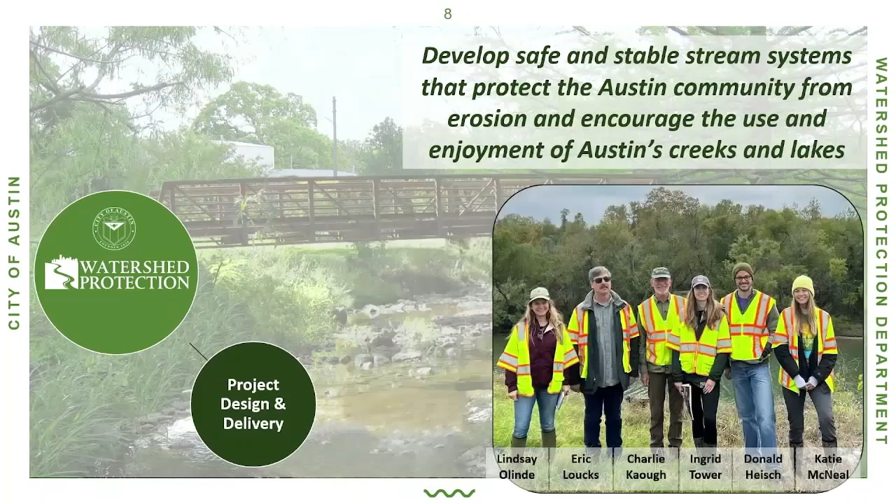For the people who are in stream restoration now, can you raise your hands so you can kind of see where everybody is? Donald, Charlie, Ingrid, I'll take you, Tom, Eric—where's Katie? Okay, good, thank you, Katie.

We are nestled in watershed protection. Jorge went over some of the reorg that we've been doing. Our division now is in the project design and delivery. For consultants who work with us but haven't fully caught up with our reorg, one other group I'll shout out is the floodplain office, which is now in planning, monitoring, and compliance.

The 4 gears that we tend to use on a day-to-day basis have to do with planning and programs, design and construction, and then technical assistance and supporting policy.

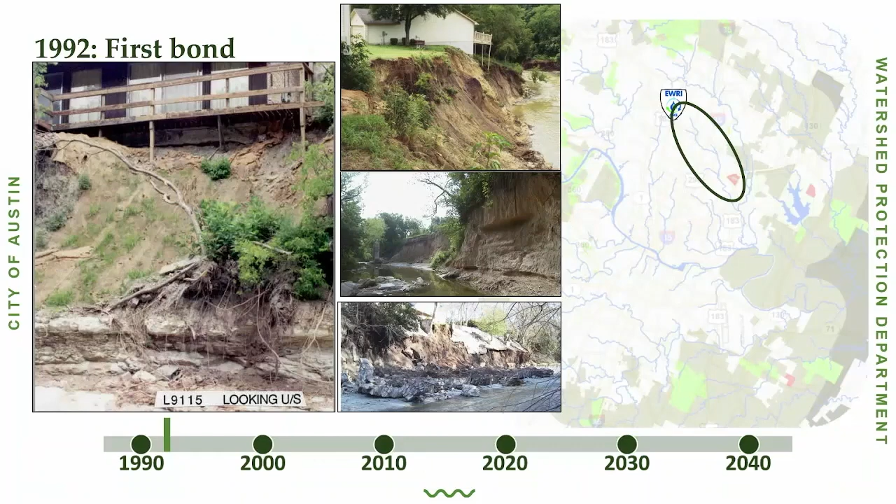Our origin story starts off near where we are right now—we're in the headwaters of Shoal Creek. Did anybody know that? I didn't; I was thinking we were in Little Walnut. In the 1990s, there was a really dramatic storm with really dramatic flooding and really dramatic erosion.

That kicked off the first really erosion-specific bond, which happened in 1992. A lot of these projects funded by the bond were done in Little Walnut, but also Tannehill, kind of central East Austin, where we're starting to get into that Blackland Prairie bluffs. These images are pretty consistent with what those projects covered.

That started this database of erosion projects. Even though it might be a little boring for people who don't love big data like I do, it's really important for our entire program—it defines the pool of problems that we might address.

In the early years, we mostly had community concerns—people calling us up saying, hey, we have this problem. So responding to that community concern really justified and led a lot of our project selection, and justified the establishment of this erosion program in 1994. We realized we can't just rely on the community, so we needed a systematic inventory of the streams, which we did through watershed assessments.

So that's going out, taking an inventory, looking at the conditions. The first set of assessments was 17 watersheds in central urban Austin.

That's right where central urban Austin is that transition zone between the resistant bedrock in the Edwards Aquifer and the more erodible Blackland Prairie. So in that transition zone is where we have all of our development. That's where we wanted to start. Where are we having the problems now?

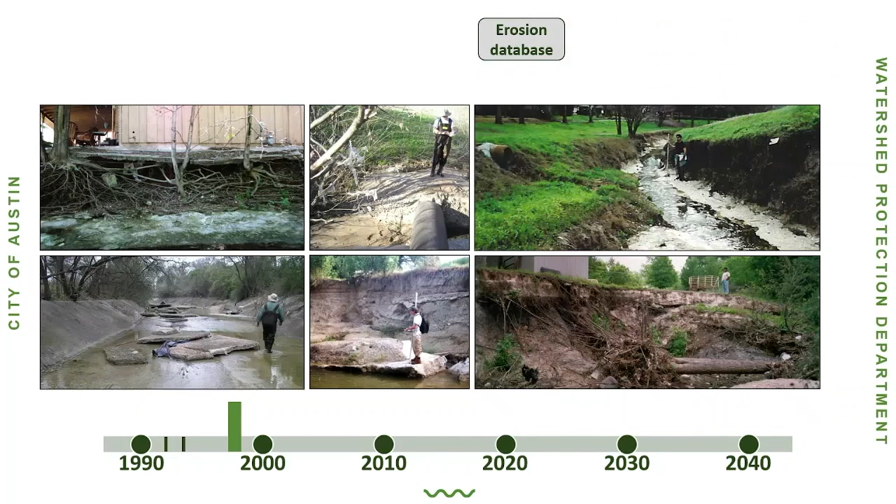Is anybody here who actually did this work, the creek walking? I can't overstate how amazing this work is. It was so many miles of creek, day in and day out.

And we still refer to these binders. There's so many binders. I'll still go and flip through hard copies of binders to get context on a project that I'm doing right now.

So this was really important for our database being established. It was main stems and larger tribs, so it wasn't every single creek in Austin, but it was our first kind of blitz through. That led into our first policy, supporting our first policy within watershed.

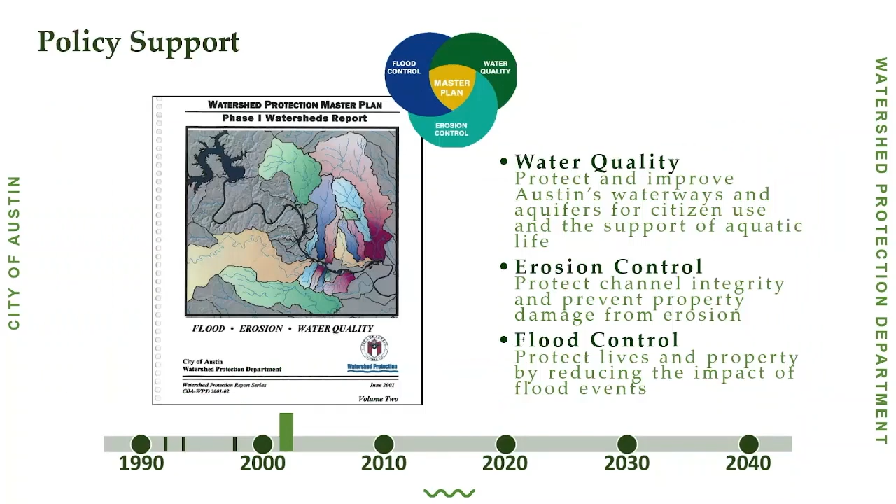So only council can make policy, so this is our first policy with a capital P, bringing together water quality, erosion control, and flood protection.

We expanded our watershed planning to more watersheds, and then in 2012, we went east, knowing that we have this desired development zone, as it was called at the time. And we knew that that was fully in the Blackland Prairie, so super erodible.

Eric Stewart, I think you were involved in some of those creek walks. We wanted to see what are the conditions before our development, so urban development, gets there. Was it pristine? No. We have 100 years of legacy, super involved agriculture. If you've heard of the phrase King Cotton, that's right where we are.

That study found that we had more head cuts, more instabilities, often because of just the agricultural history.

I will pause. I was thinking about this talk, and I was like, my favorite ride at Schlitterbahn is the Lazy River. This talk is not the Lazy River. It might be more like Riffle Pool, but I am going to pause right here for a little pool moment to talk about head cuts.

For people who don't know about head cuts, I didn't really know about them either, other than thinking of a beautiful waterfall, which is a head cut that moves over geologic time. Head cuts really drive a lot of our projects.

This is something that came up in the Northeast, but also in our transition zones. If you're familiar with Austin, kind of East Austin, Fort Branch, head cuts move quickly, and it doesn't really matter what's on top of the land, it matters what's on the bottom.

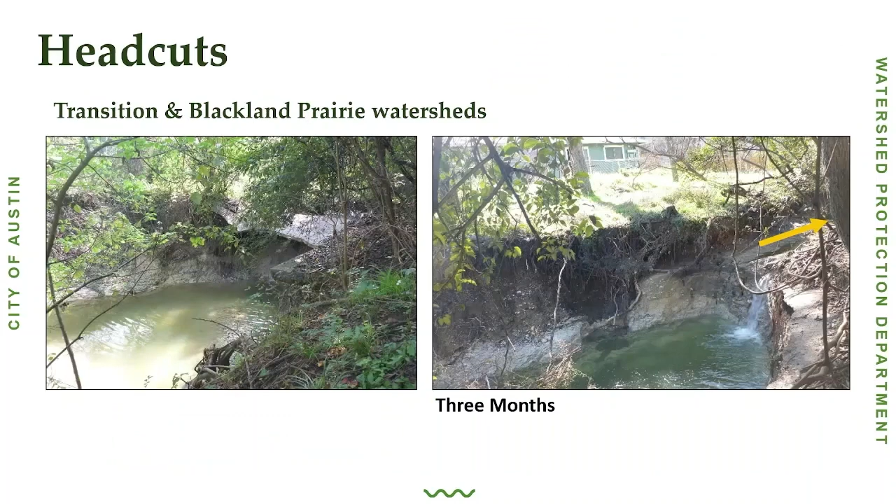This is an example of one of the projects that Kelly Rich worked with us on, where a head cut is going through a stream system, through concrete riprap, and I think of them as little mobile land-eating waterfalls. They're evil and sort of stressful to me.

A lot of our work is based on this. If you're taking out a grade control, maybe it's tree roots, maybe it's a debris jam, maybe it's a wastewater line. If you are taking out a grade control in a really erodible area, that head cut's going to keep on migrating. If it hits an equilibrium slope, great, but that usually takes a long time, so it'll hit the next hard point. So here are some examples of head cuts that we try to secure so that they don't basically eat everything going upstream.

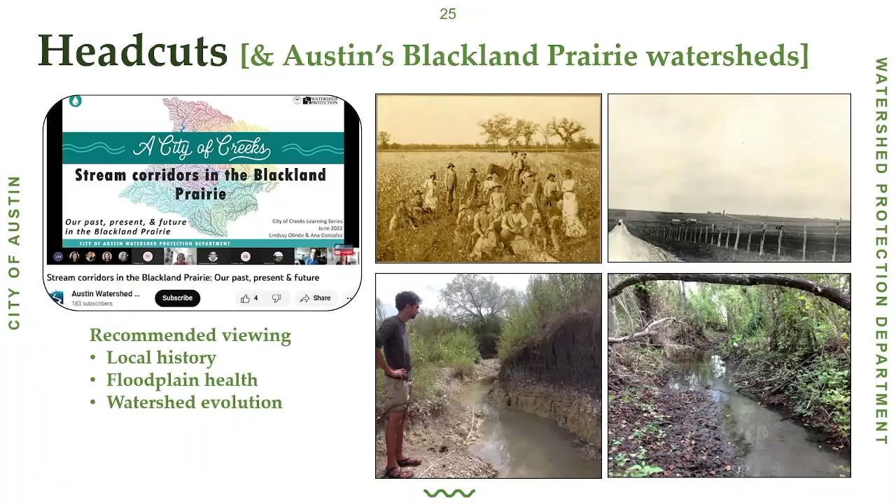Sidebar, for anyone who likes talking about Austin history, ecology, and Blackland Prairie, I did some work with another group, with our ecologist, on the Blackland Prairie watershed. If you're interested in this, there's a YouTube on it. If you go to our YouTube page, there's also just really great YouTubes from watersheds, so you can learn about salamanders, spills, and they're all super short. I can't say that I speak like Ken Burns in it, but I am really proud of the work, and I think it's a nice intersection of a lot of our issues.

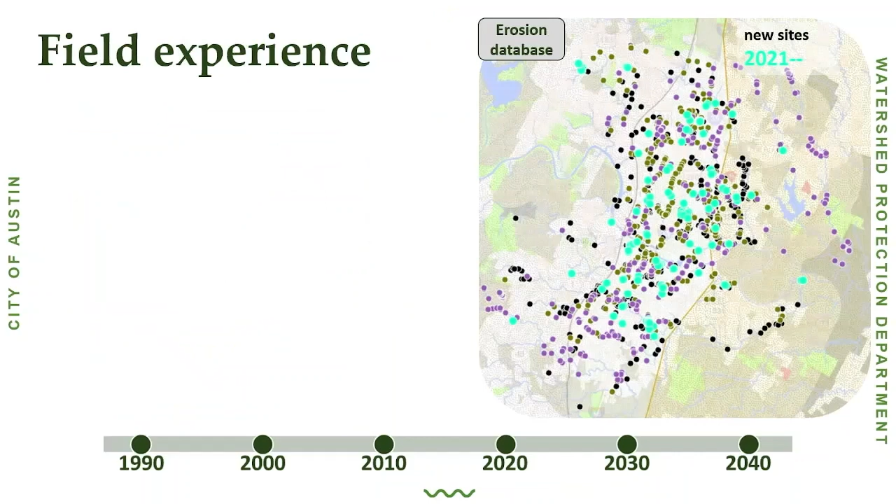As we're going through time, we're constantly building our erosion database, but then we're also revisiting existing sites. So we have 30 years of this expansion and also some of the sites that get more attention because we have more needs there. This gives us a lot of field experience.

This field experience, I was just looking at all the images and kind of thinking existentially about what is this field experience? How does that impact our designs? We are constantly, consciously and subconsciously, picking up notes.

When it's a 30-year program, we're able to go to sites and look and see over the years how it's continued. We connect with the community often. Having our designers see projects that come in as an urgent community request, and then bring that into design, is really rare and super rewarding. It also gives that unquantifiable sense where we can show up at a project, an erosion, or a call and have a sense of whether this is urgent or not. So it's building intuition, that professional intuition we all strive for.

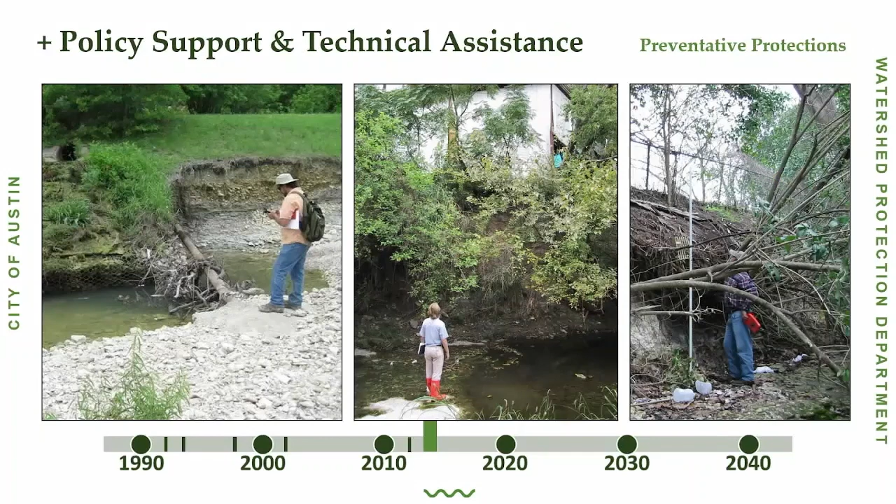The walking around looking at streams, fixing streams, we also have very curious minds. We're not just recording the problems, we're also progressing the policy over the 30 years. Here's an example: Morgan and Mike Kelly were looking at creeks and thinking, wow, we are spending a lot of money trying to save these houses. We need to think about how we can prevent this from happening in the future.

So in 2013, wrapped up in the Watershed Protection Ordinance - thank you, Matt, for all your hard work on that - we were able to bring in the concept of erosion hazard zone protection through technical support. We're doing two things. One, we can't have any utilities in the erosion hazard zone without some kind of protection, because we don't want to keep chasing more resources to protect them. Two, developments can't make erosion worse on another property. It's not so much that you cannot build here, but if you build here, we need special protective works going on.

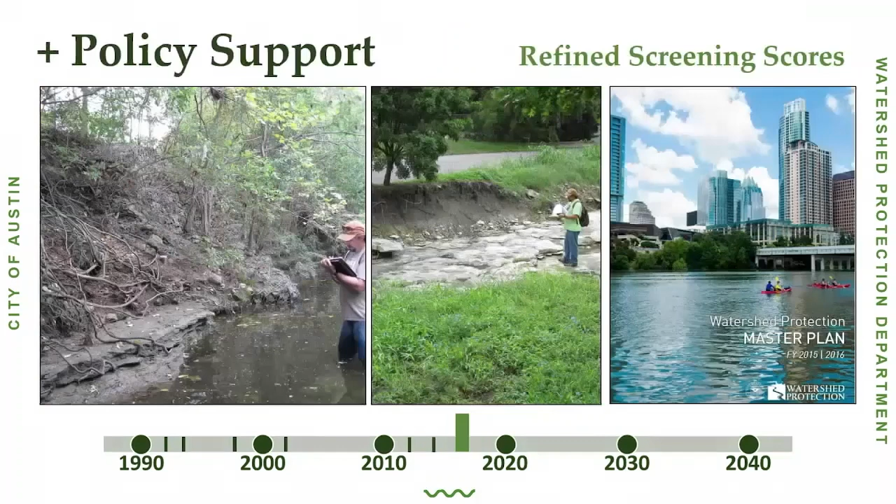Another part where we're constantly trying to progress and refine the program: Morgan said we're getting all these databases, all these points, we need a better system of ranking and prioritizing them. So we needed a simplified screening score. I try not to use the word problem score, because I love a good number, and if I hear a number I tend to get attached to it - it seems kind of biblical. So a screening score is what we're going to call it.

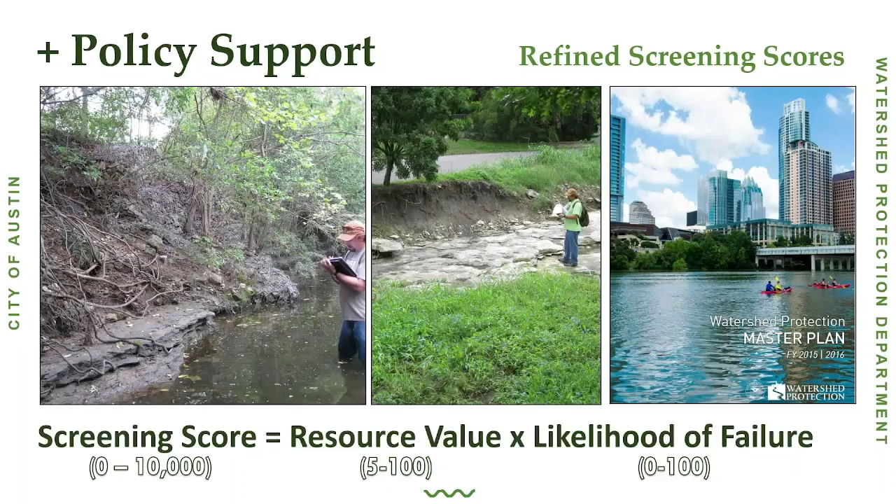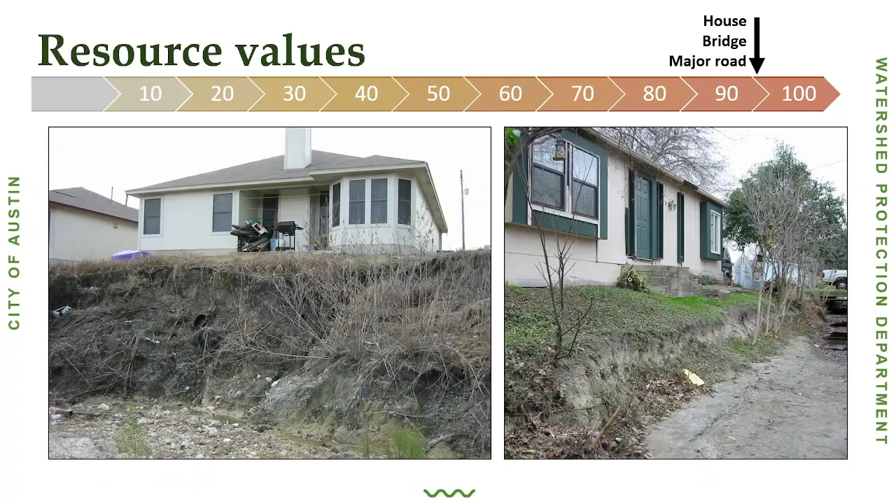It's really taking the resource value times some likelihood of failure. Let me walk through this a bit. We had to designate, through our master plan, resource values, and we have a whole range going from 5 to 100. The highest, as you'd expect, would be roads, houses, bridges. We have parkland, and then we have fences and yards. These might not seem really important, but when you have a fence that's falling in, that's part of your security, part of your land. We also do projects, which I'll talk about in a second, about aggregating our fences to help communities.

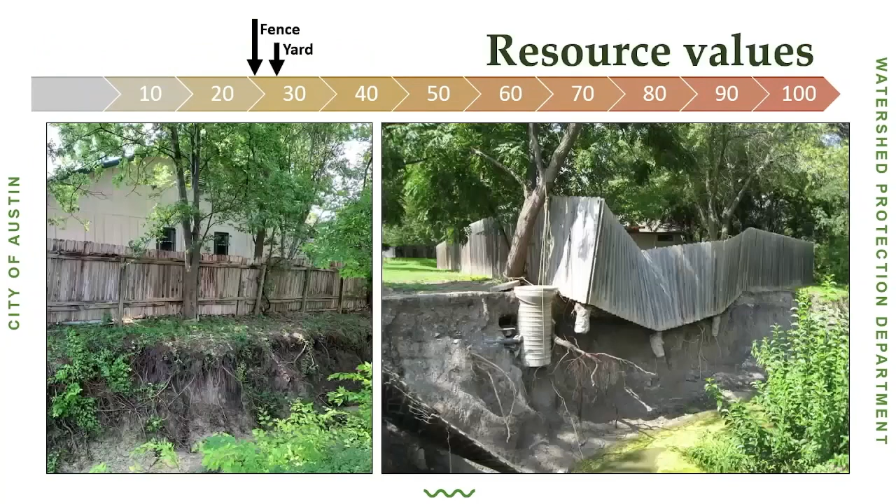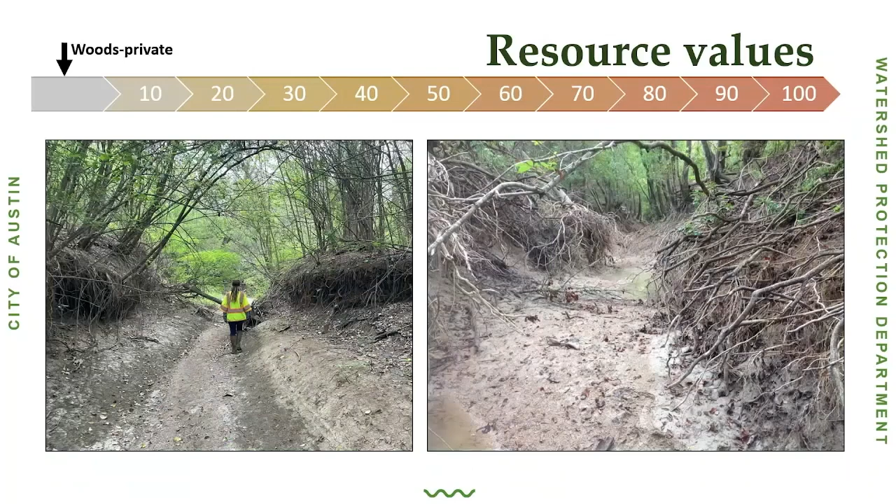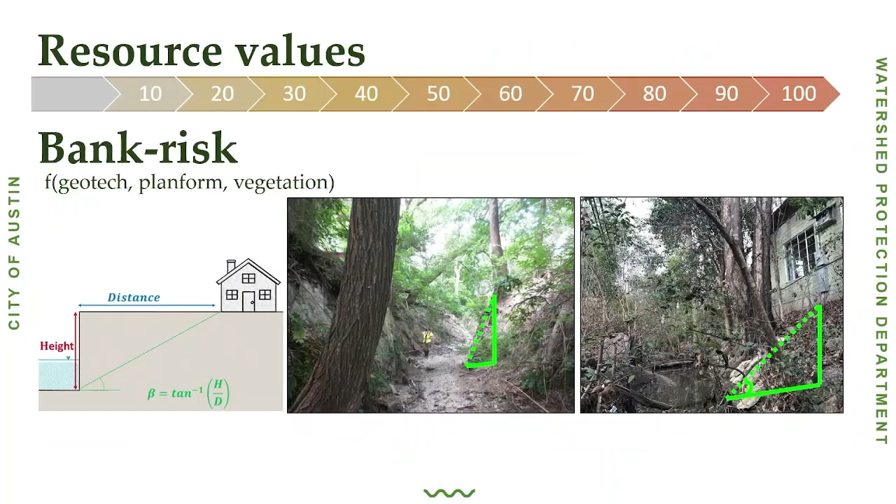And then we have this - really bad incision, right? But the resource is a private wood, so we have it as a low resource value in this program. The risk, in general, super high level, is a geotechnical risk. It might involve plan forms - is it on the outer side of a bend? Is there vegetation helping the bank stabilize? Here's an example of one of the worst case scenarios: we have a house, super steep, that gets our highest score, which is 10,000.

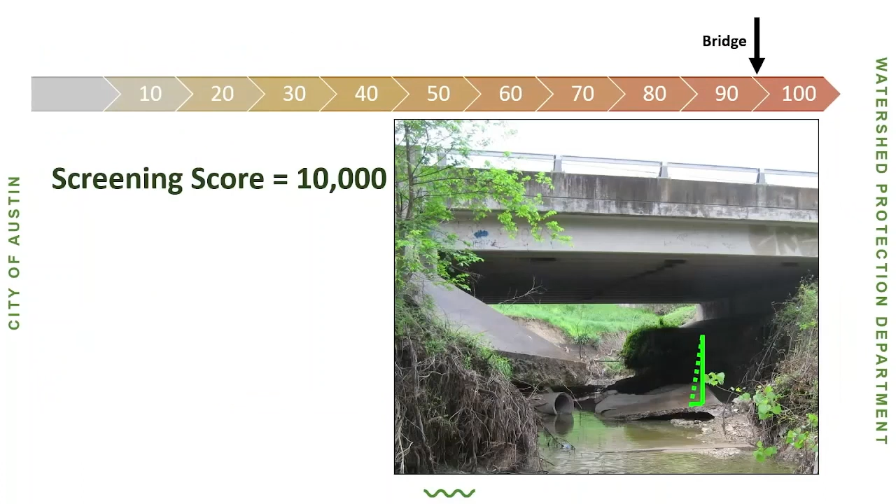So we're now continually taking in community concerns. We have our blitzes and our watershed assessment. Something that's happened more recently for the community is that we have a 311 app - if you don't have it, love it, use it, download it. It's super easy to submit concerns to the city. That's something people can do without waiting online. You can get an email back, and that's been good for the program and for the city.

But one of our biggest criticisms is that a lot of our database is community driven. We did snapshots on the main stems and major tribs, but we're still doing a lot based on community calls. So who has the ability to call? Who knows how to call? That's a bias. One of the components our department is starting to address is equity.

One of the pilot programs is through field engineering, doing really cool work with this equity-based project prioritization protocol pilot - say that 10 times fast. What they're doing is looking at census tracts with high social vulnerability, going in and looking at the whole swath of drainage issues.

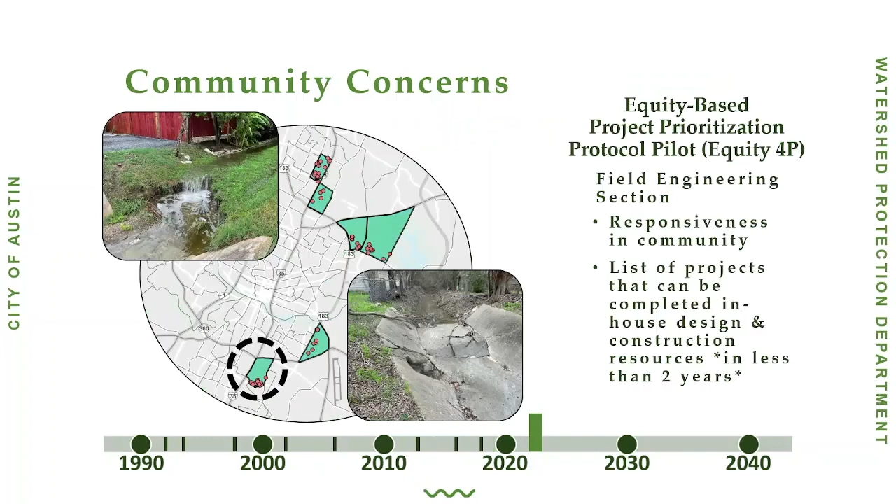What might be underreported? If you've got a call about one flooded house, there's probably more like 10 flooded houses nearby. I love that Jana Renfro, who's the supervisor, has a phrase about these kind of projects - it might be forgettable in your career because it doesn't have all the long-term big equipment, but it really makes an impact for those 1, 2, 3 houses right next to it. And they can do this within 2 years, curating these lists of designs that can really be cranked out in 2 years and help people immediately.

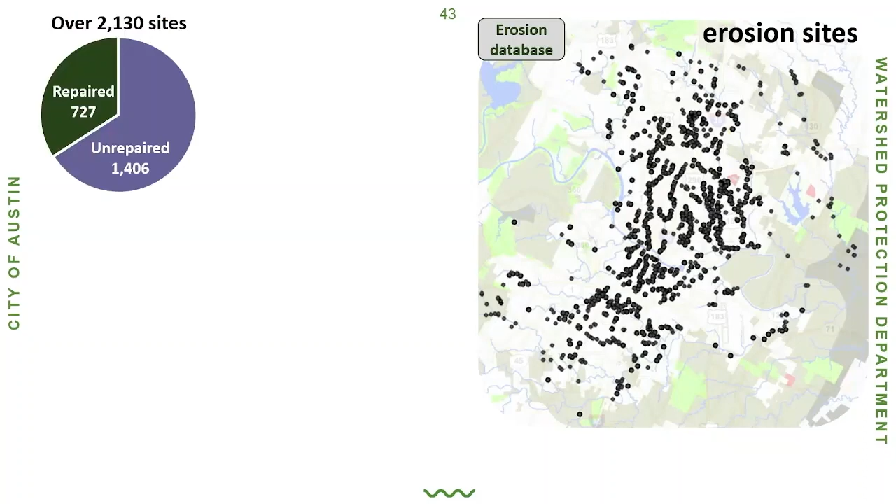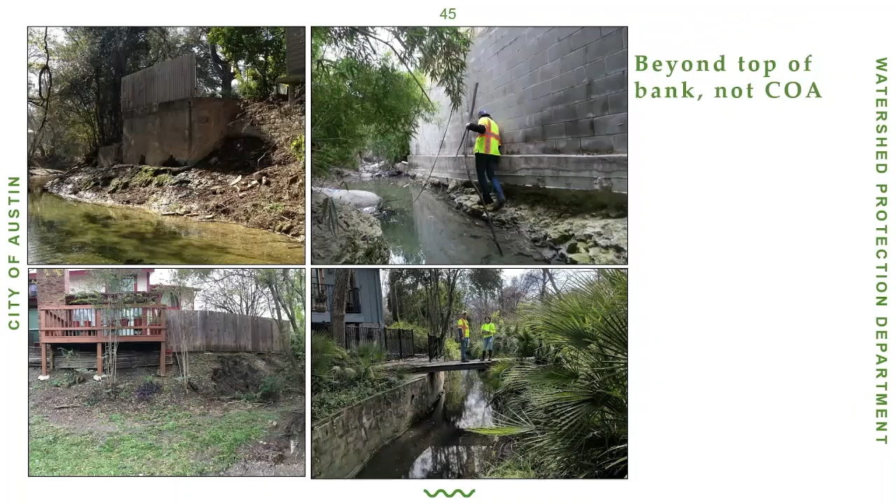Our database has over 2,000 sites. Once you get on the database, you're on there forever - we can mark you as repaired, or change you, but once you're in it, you're in it in general. But a lot of those sites are sites that we don't actually cover. We do not cover egregious encroachments into the floodplain. So if you're going to build a deck in the creek, we are not going to go make sure that it's stable.

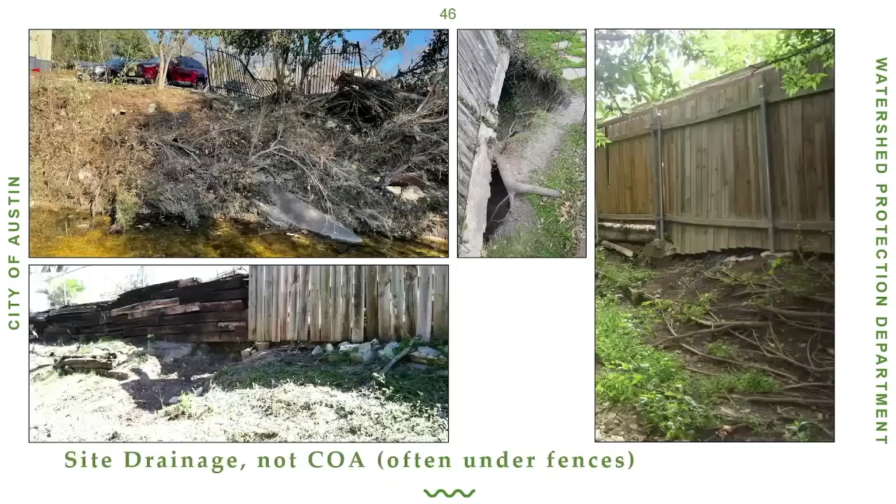Another thing with CoA's is that we also don't generally protect against site runoff. So if you have a parking lot or a roof draining into a local place causing erosion over the top of the bank, this often shows as a slight dip in the fence line. That's site runoff, not stream erosion. What we do cover is a lot of high banks, legacy impacts of head cuts that have already come through, and head cuts that we're actually watching progress.

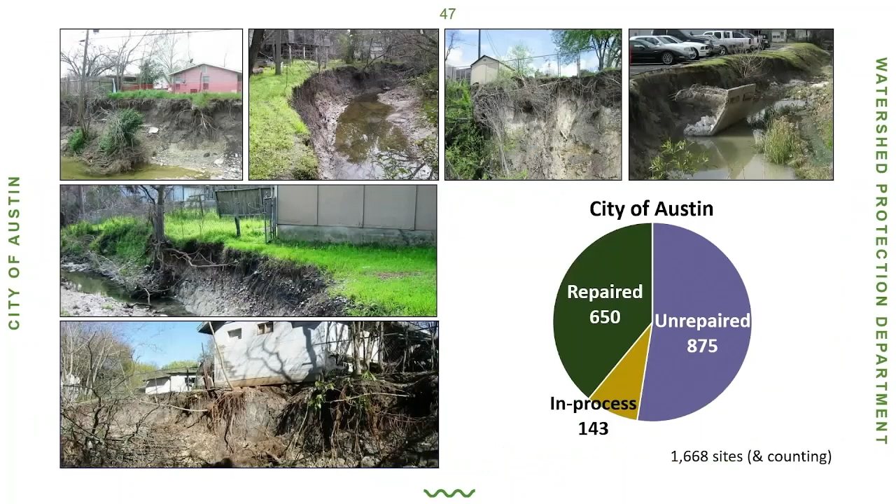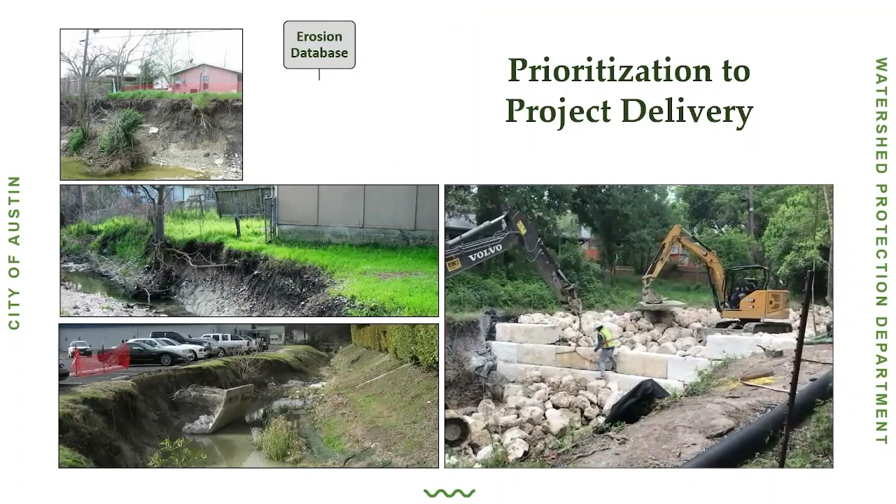We have this database now of projects in our domain, and we have to prioritize which ones get the work done, which ones we're going to start tackling. We have a screening process for SOPs.

The way the screening process starts is that we use those screening scores, and we break them up into two different groups. We have that local site scale, maybe a pocket here, a pocket there - these are smaller, a couple hundred feet. And then we have these larger reach scales, which might be a few thousand feet.

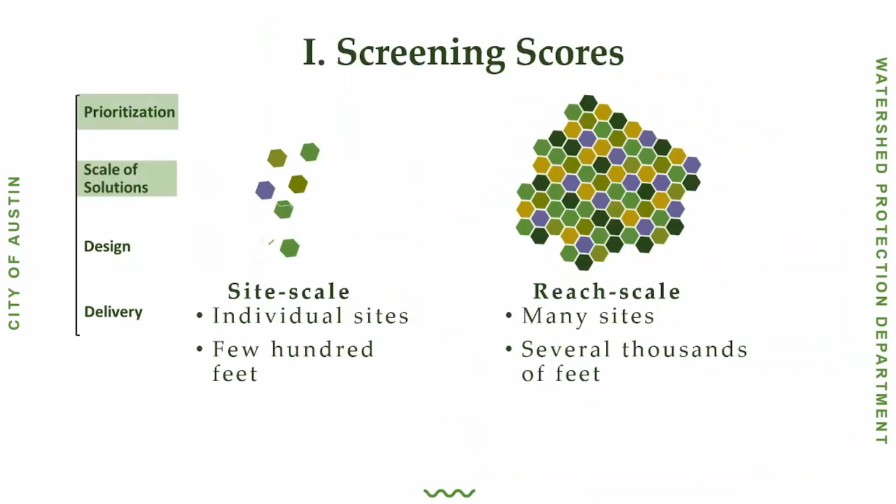But we don't just take the numbers and go do the projects - we bring in that field experience. AI is not going to replace us because it's just a screening score. We have real people who know the research, who do the research every year. We might be a little grumpy when doing it because it's very intense to go back through all the files and make sure our database is QA/QC'd, because we really want to make sure that what we're proposing for the next year is, in fact, what the reality is versus just a screening score. That's really important to me.

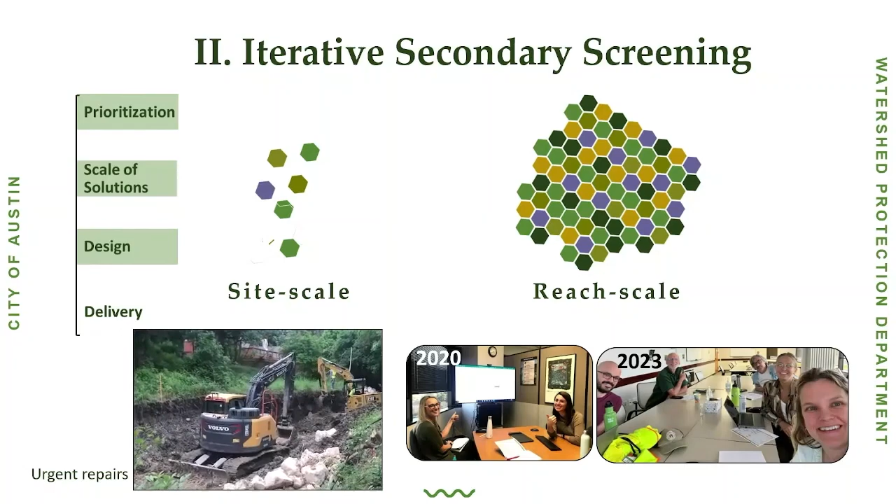This also lets us be flexible. We might have a long-term, big reach scale project on the conveyor belt of CIP, but if we're seeing a head cut that's moving fast, like this one, we can do an emergency repair at the same time. That lets us be really flexible in our annual planning. It also lets us find out whether we can do field engineering really quickly, like sketching on top of a photo, where maybe we don't even need a survey.

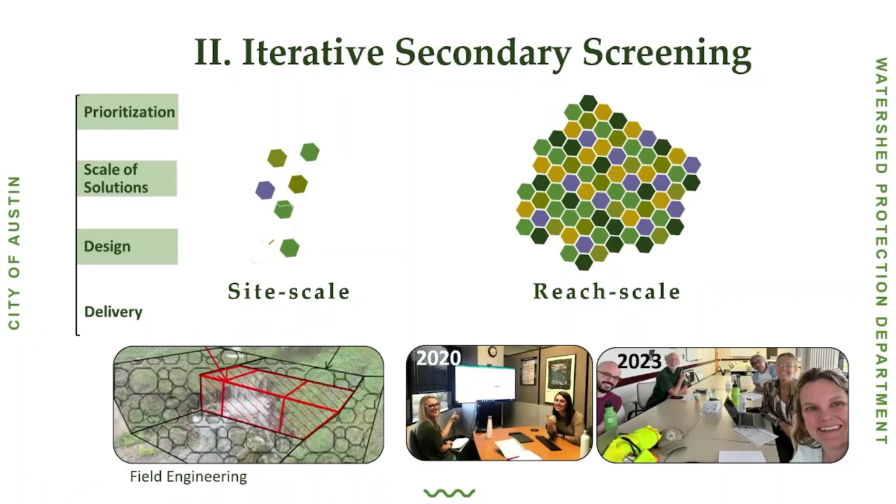For our site scales, the design is usually done in-house, which is something we're happy to do. It keeps us - how do I say this - CIPs take a while, so you kind of like to get that short-term enthusiasm through in-house design and being able to see something being created. Field engineering is even faster, so it's less formal. We have our own in-house survey crew - I think Alonso is here. And then we have our big CIPs, which is much more formal, tied to the strategic plan.

Another piece of our program that is interesting is that we have a MIP integration process. From the very beginning, in 2001, we wanted to make sure that we weren't hurting another program. So I can't go create this really restored, high roughness stretch of reach if I'm now flooding a house because I added so many trees. We want to make sure we do no harm, and that we're optimizing what we're doing.

If I'm going to go put in a bunch of blocks to help a house that's having drainage issues, and there are other small, fixable problems, I want to address those too. I don't want to just say we're only doing this one thing. That's part of community engagement and community support.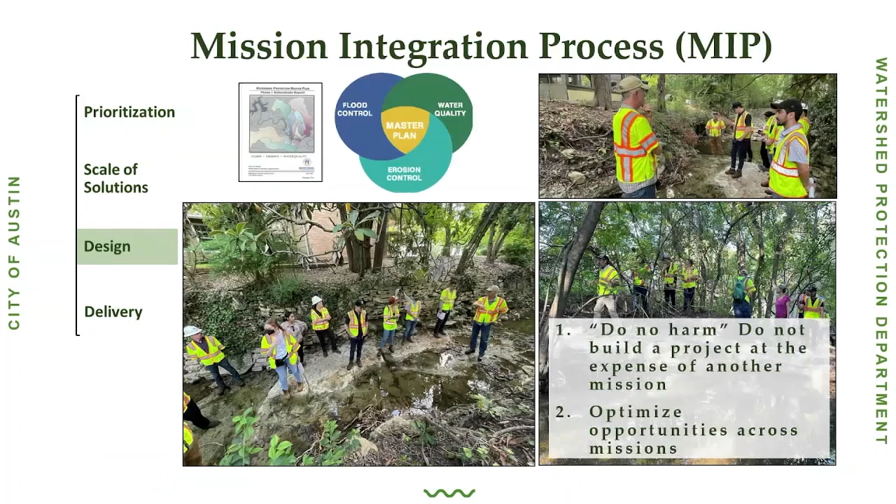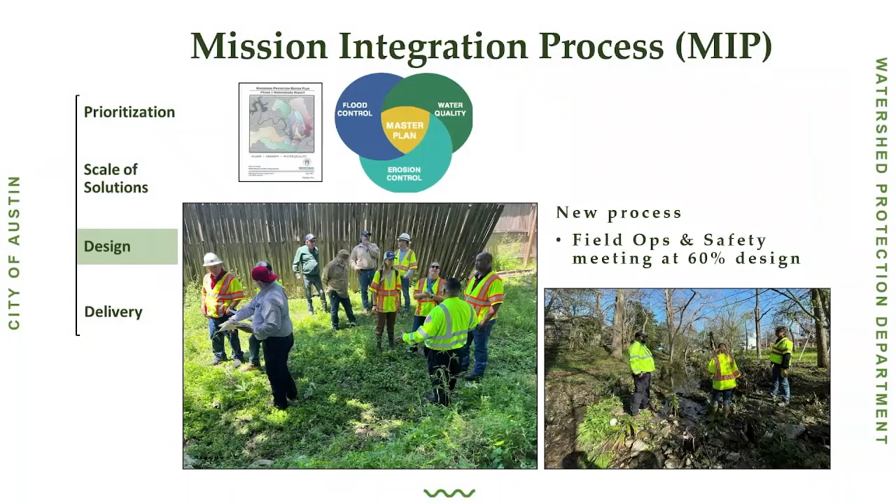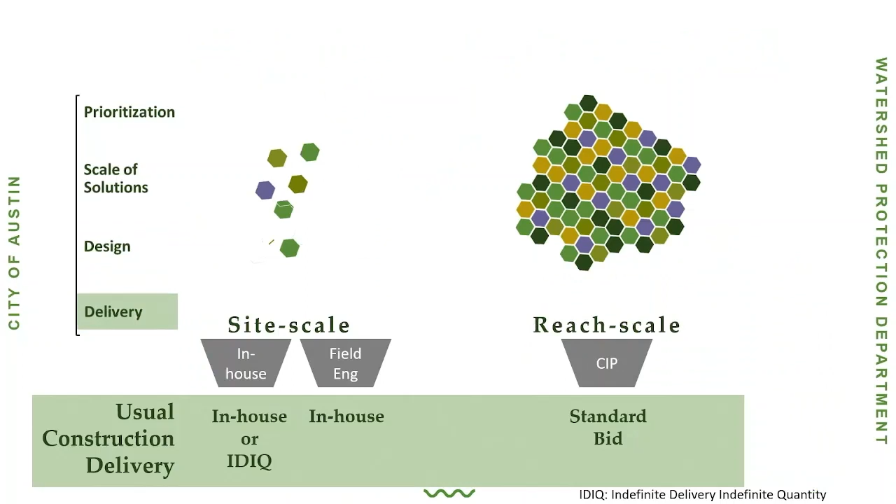One thing that's new in the MIP process for our consultants is that we're now incorporating field maintenance conversations at 60% design and safety. When we do our site-scale, small-scale designs, it's usually our in-house field operations crew or IDIQ. For our simpler, faster field engineering, it goes straight to field ops, and CIP is typically standard bid.

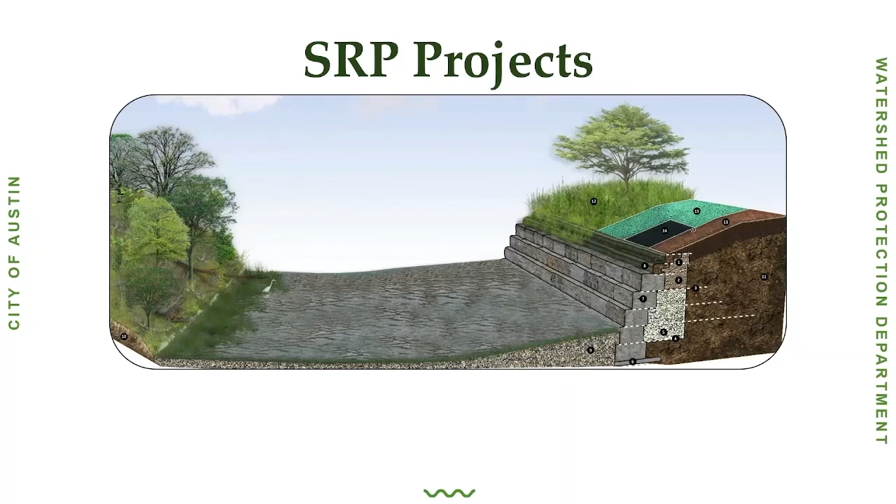We have over 400 projects over time across the city, and I want to get into what our projects look like. Morgan has a great phrase he loves to say: from the ponytail days to the long beard now, it's the right horse for the course.

So there are times when we have space to lay a slope flat to allow more floodplain connectivity, but other times we really need to harden a surface or a bank. We might have a house right there, so that's a constraint we need to take into account for each section of a project. Some of our CIPs include lots of different solutions, and some of our in-house projects can only do one. So that's important.

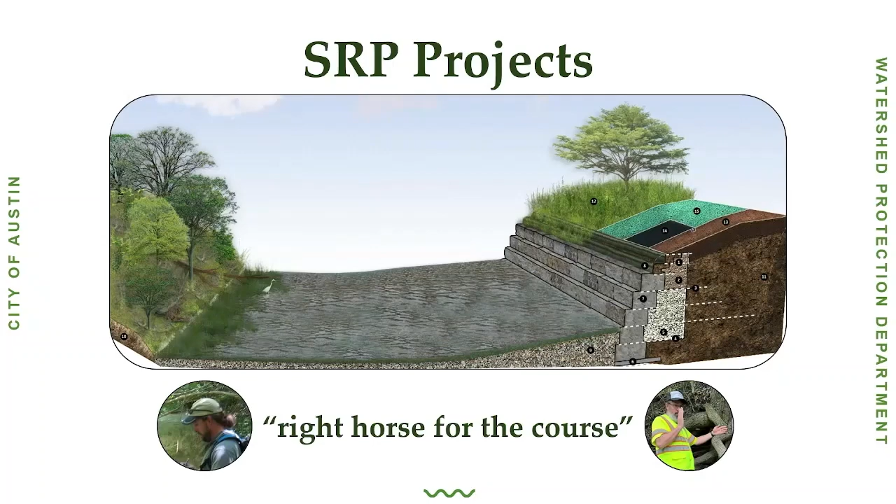I wanted to go through this because I was curious too—I haven't seen a lot about how the projects have changed over the years. So not all of our projects looked like this. Caveat: I did highlight some things that we just don't do anymore for contrast.

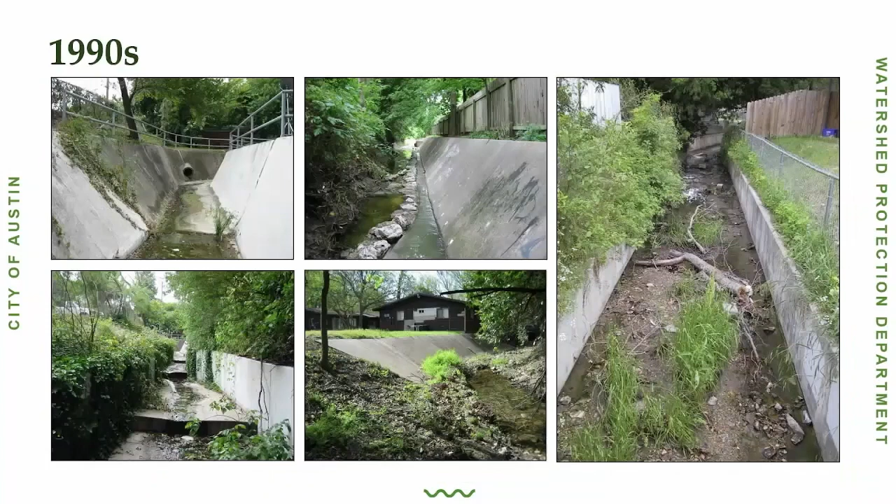We do not install gabions anymore. Gabions are riprap in cages—they're basically sediment time bombs. Something will break them open and release the sediment. We also tend not to do concrete culverts or concrete riprap anymore.

In the 2000s, our design started to get a little fuzzier, a little greener. This is an example of our boulder toe with some soil lifts and some lovely, lush vegetation coming up.

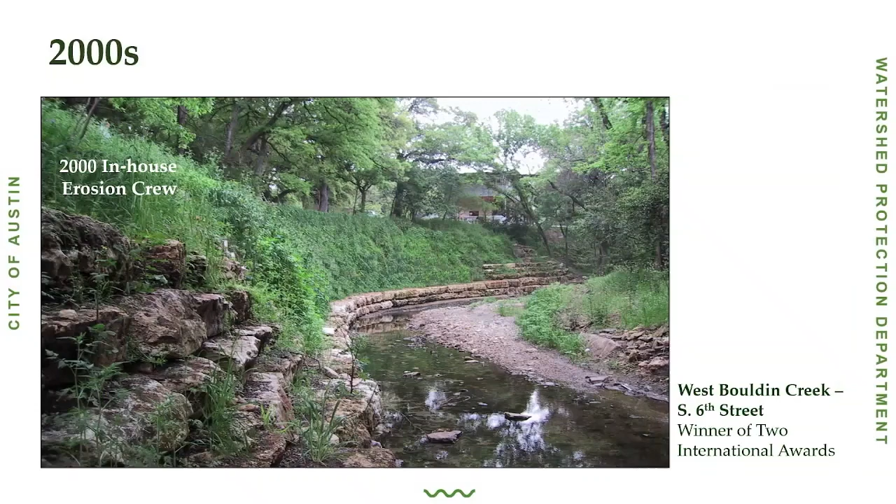We continued that work and started switching from concrete to some fancy block work, which we learned recently has a lower carbon footprint—the limestone blocks specifically.

Through those first 15 years, we developed some quirks that our contractors don't love, but a lot of our quirks have to do with what we've seen fail. Our biggest constraint is space. If we're proposing something new, we want to talk about maintenance plans. And we always have that soft skill of managing community expectations and managing how it's going to look.

We don't have a light hand. If we're going to do a project, it might be nine months of a pretty loud project. So preparing people for that whole experience is important.

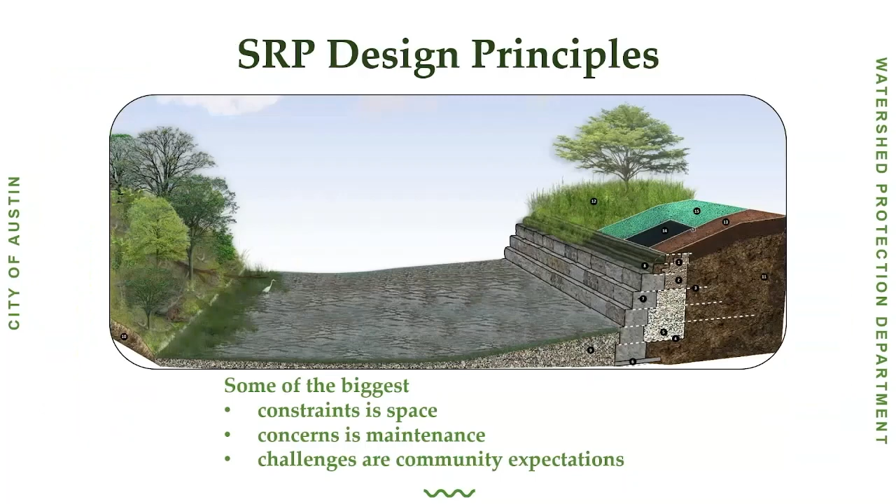Some of the quirks we have is that we love riprap—not just any riprap, we love graded riprap. For people who don't deal with or have a love of riprap like we do, we might specify an 18-inch riprap D50, which is a median. That means we want to see a pretty big gradient so the rocks can lock together the way we expect.

So we do a lot of riprap sizing, and it does drive our contractors a little crazy, but we think it's important because we've seen projects fail that used just one size.

Another thing we do is be a little conservative about how many blocks we bury, and that's because we've seen so many walls fail because of scour. And gabions—we just don't do those anymore.

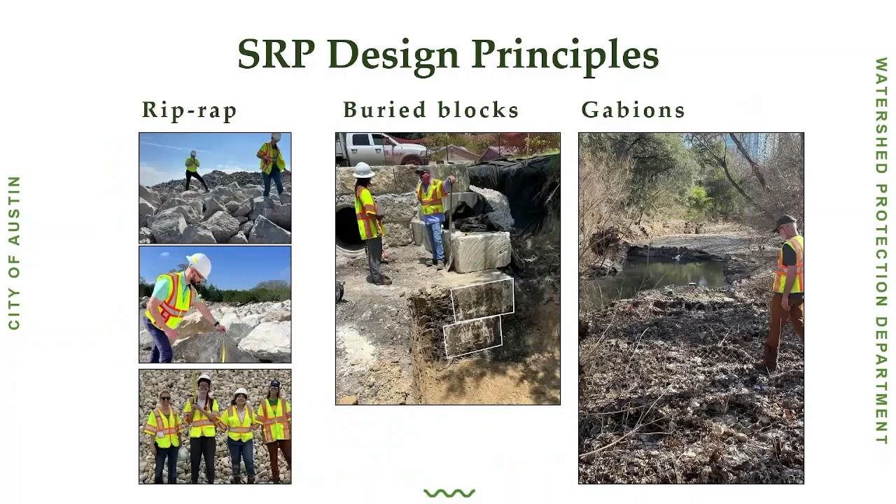Something we're trying to do is use less plastic. Another part of our field experience has been seeing animals caught up in our plastic. So we need solutions if we have to use them, because sometimes that's the only thing that will work in that scenario. But if we cannot use plastics, we want to avoid involving that in our projects. For the consultants out there, I'm really interested in this topic, especially lessons learned.

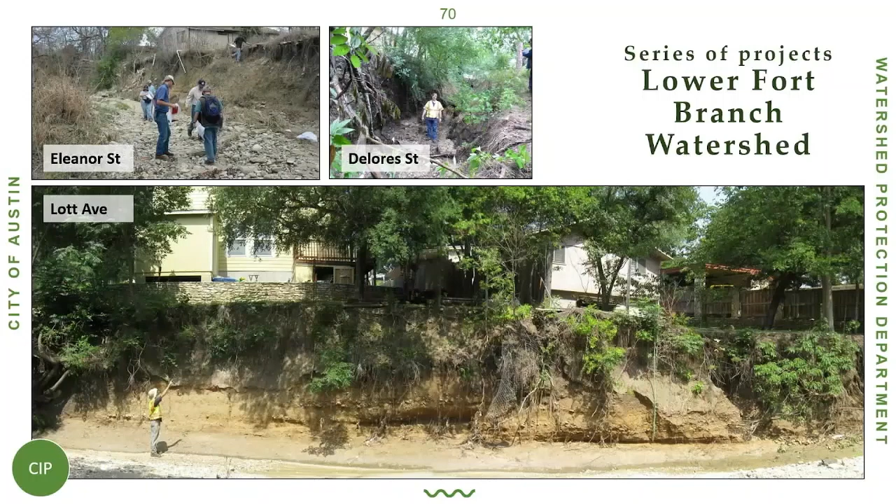I wanted to give you guys a feel for our more recent projects. This one started in the early 2000s, Fort Branch. I'm going to go slow here because Morgan went out recently and we have some really great before, during, after, and now pictures. He went out a couple of weeks ago and took some images—this is in Lower Fort Branch, with the usual head cut problems galore.

And we were able to do a CIP where we did that boulder toe, stabilizing with the boulder toe, and then a softer soil lift.

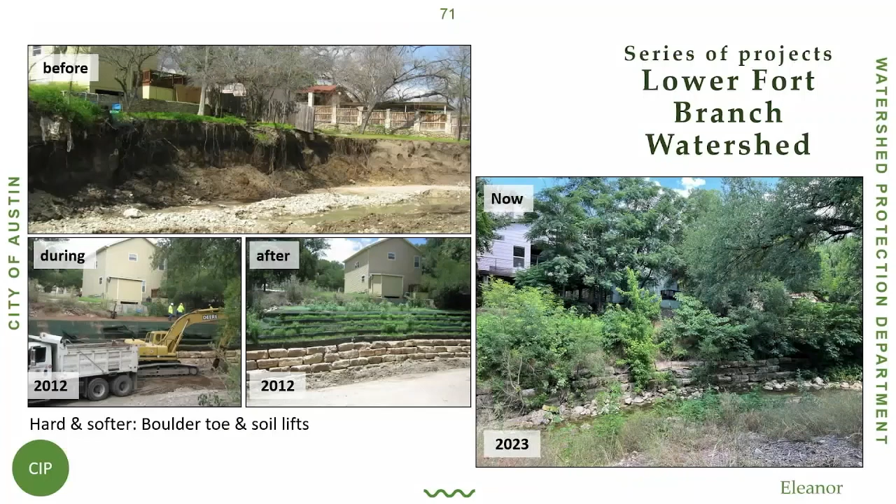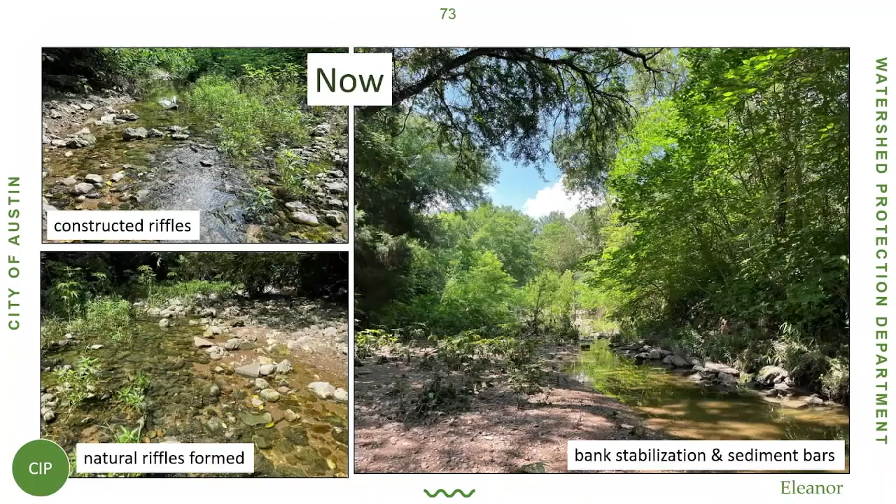This is one section. Another section, section 2, we did constructed riffles, and Morgan was able to see that these riffles persisted. There was a lot of sediment analysis in this one, and they found that the riffles were creating more riffles also. So kind of a growth, some bank stabilization, and it still looks good on the soil lifts and even sediment bars.

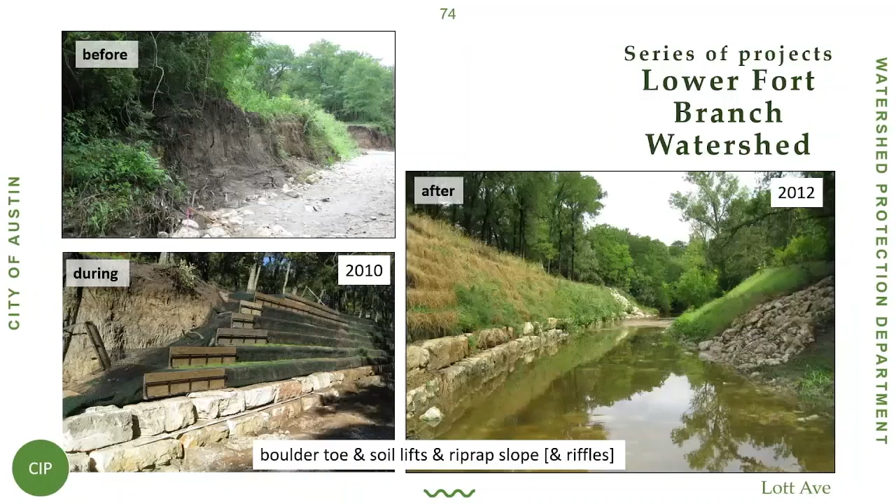Another section is similar. I like this just because it shows how soil lifts are made, so a little process image. And today, it's looking great.

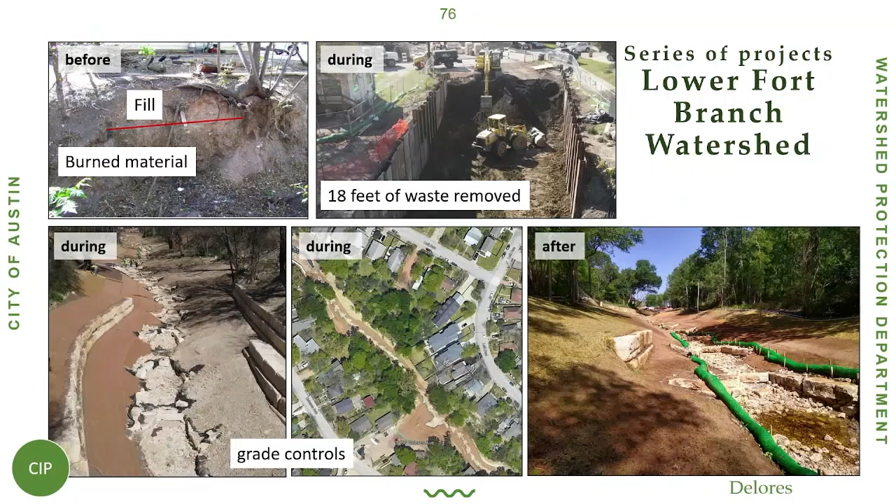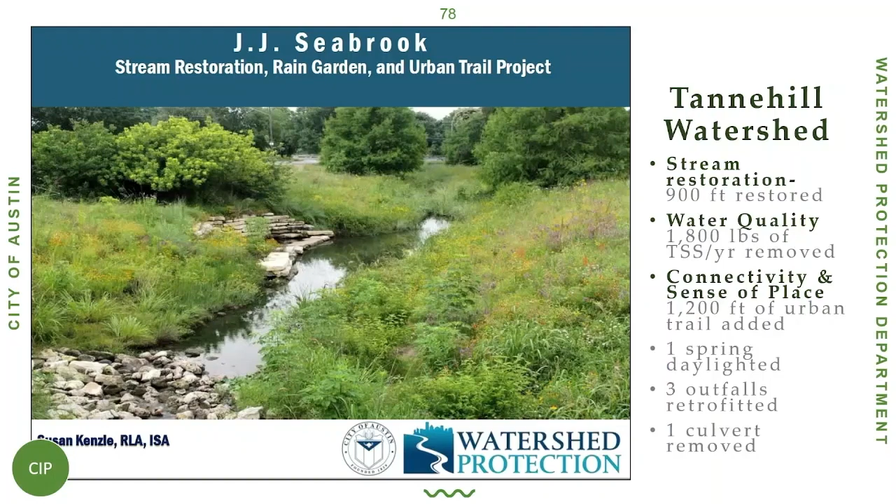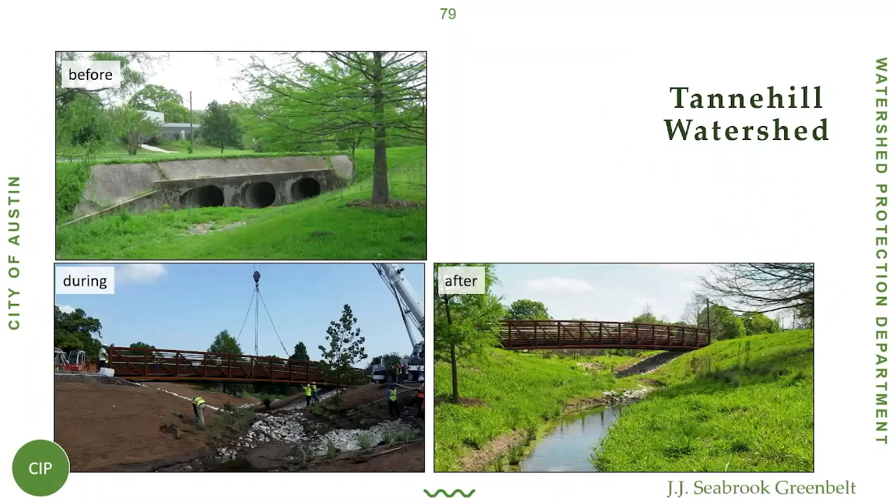We always love taking out culverts, because they clog. So this was a case where we could take out a culvert, we could take out a whole street, actually, and we put in a pedestrian bridge. People loved that. I really like this image.

This is just a shout out to being able to visualize something that's not just off the shelf. So Susan was explaining to our contractor how to build this little settling basin, I think nook sounds better. And she was trying to show the elevation, so this kind of rainbow draft.

Every time I run into this image, I just like it so much because it helps convey a design beyond just gray. This was an example where they found a seep, and the seep was really muddy because of the layer it was flowing through. So they were creating a settling basin to help get that water quality improved.

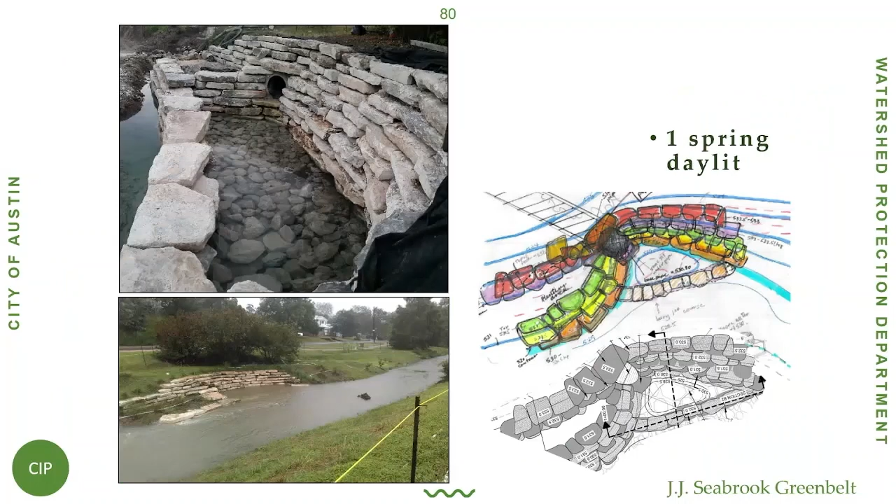She also did a really great job with community outreach. I know you guys probably can't see the words, but this idea of helping people understand what they might expect at the end helps keep gaining trust through the noisy, muddy, dirty process. So I really appreciate that.

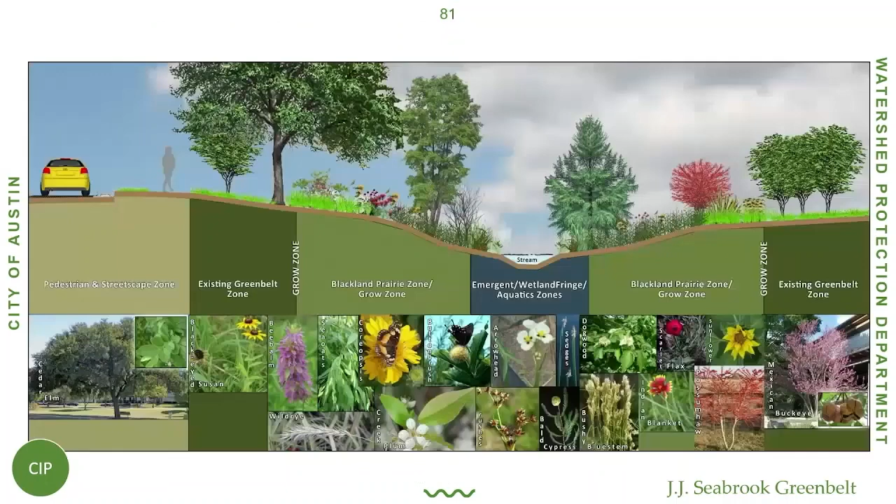Another project that Susan had her fingerprints on as a co-sponsor was a stream restoration in Waterloo. If you haven't been there, it's really a beautiful park downtown, with super easy parking at the Capitol. This project was between 14th and 15th, had a lot of trails as a constraint, and bridges, and the initial design from the consultants was really hard rock and not much green.

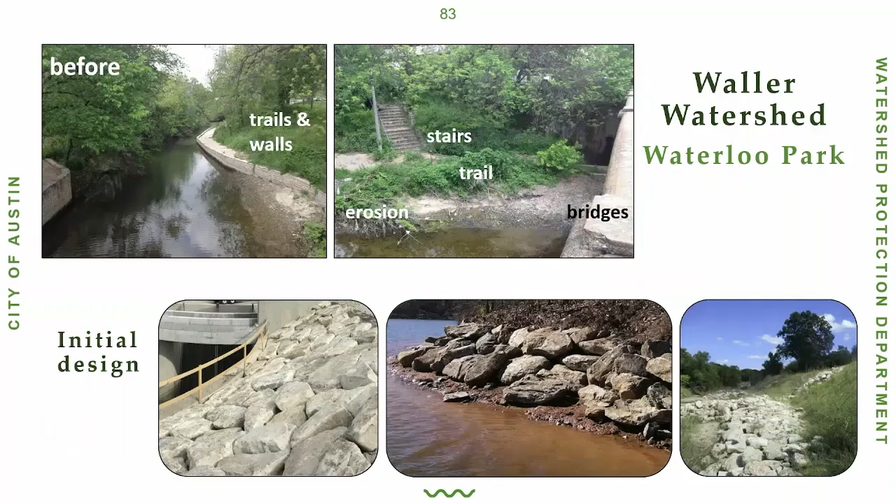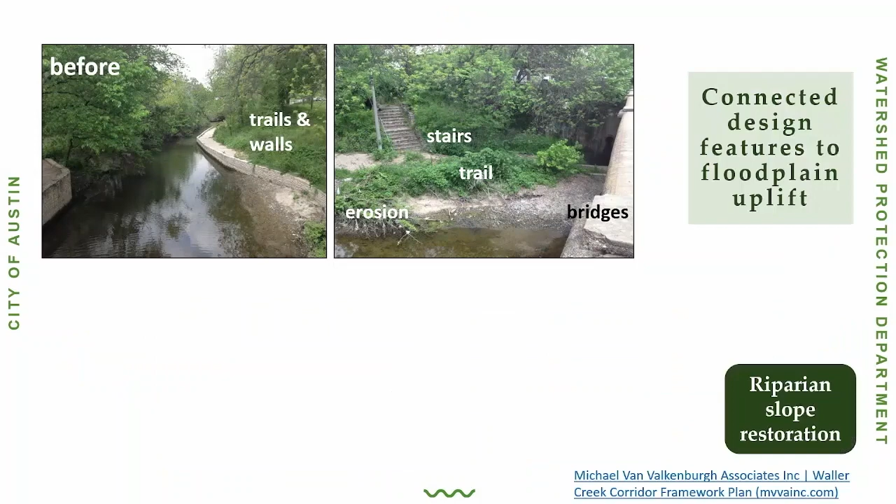That didn't fly with our floodplain modification team with the city, so we couldn't get a permit, so we needed to show ecological uplift. And what she was able to do with the consultant is really make our Appendix X toolkit talk directly to our design features.

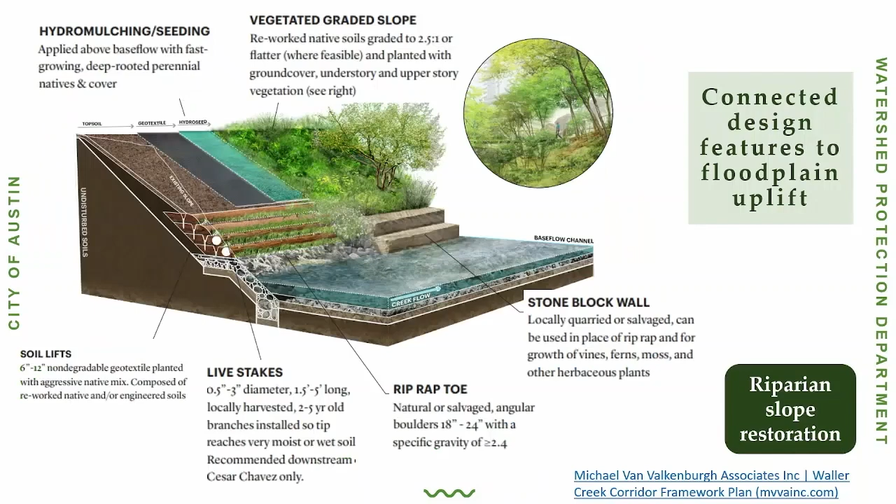So this was more of a communication tool, but it's one of my favorite tools she was able to make, where we're connecting designs we already use and being able to do the check mark to prove environmental uplift. So this was incredible.

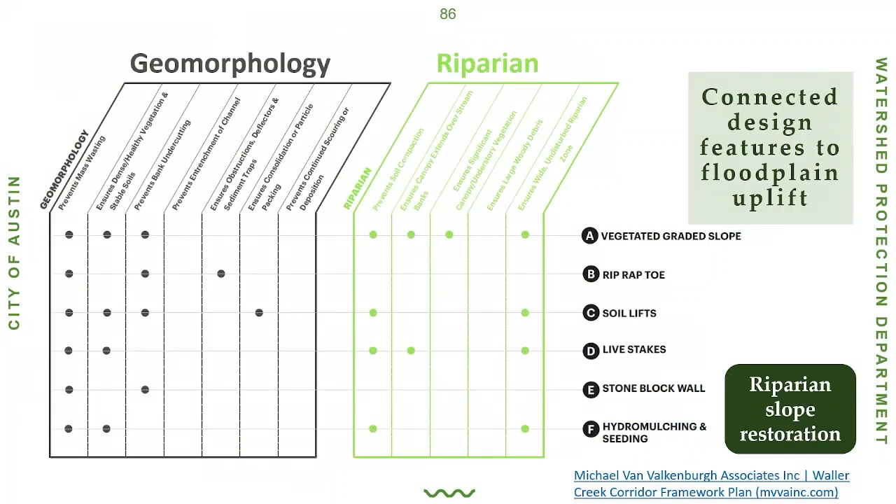If you're interested in these kind of figures, I love infographics, and I'm happy to share this one. So here's where it looks like a toolkit, similar for the floodplain bench.

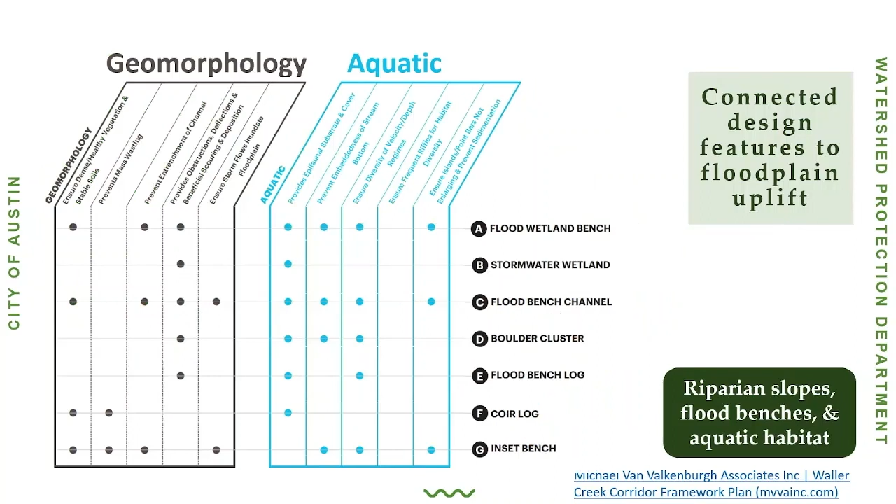I thought this was such a good communication tool because bringing these requirements into actual design has been a disconnect, and that was really helpful that we can build off of. Hot off the press, yesterday she did a post or a blog posting on this for the landscape architect group.

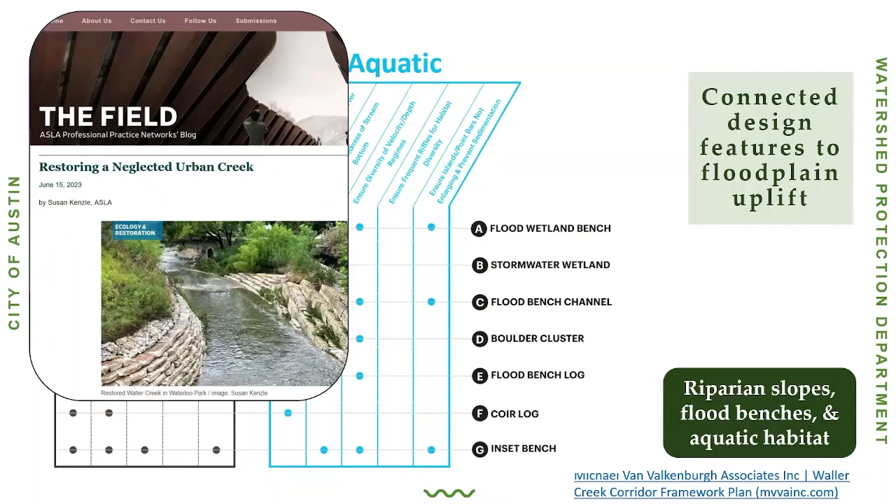So something completely different that we get into is we're also managing our resources within Barton Springs. If you're familiar with Barton Springs, there's Eliza Springs, and we had a failing flume, box culvert, whatever you want to call it, in Eliza Springs. We have salamanders, as you know, and then also historic walls in this area. So it was a very complicated project.

I love talking about gravel. One little nuance is that the salamanders needed a bit of adaptive design. They didn't like the angular gravel that we usually use, so they ended up trying again and putting in rounded river rock. That's when they really started to see that jump in habitation for the salamanders. So that's another iterative design piece.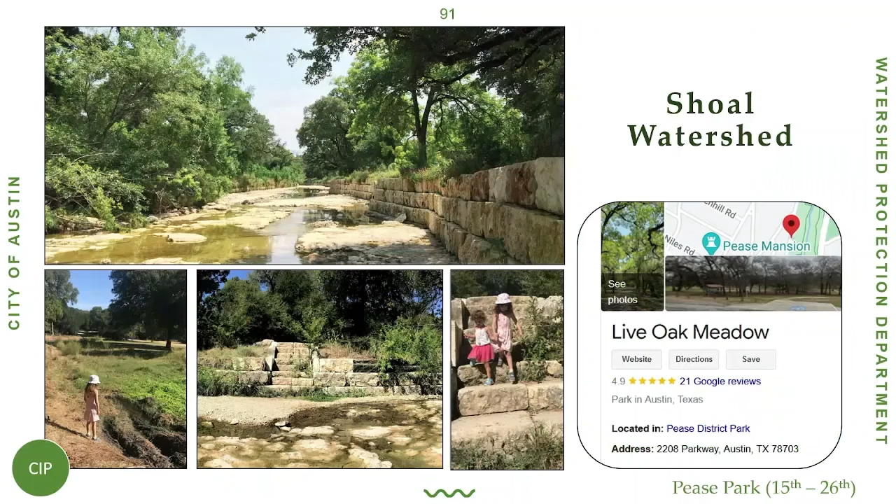This is just a shout out to say, if you haven't been to Live Oak Meadow, 21 reviewers on Google can't be wrong. It's a great place where we can connect the stormwater treatment that has this beautiful wetland, one of my favorite education signs that we've done as a department. And if you go, don't forget to find this little staircase because you can go into the creek, and it's an incredible place to spend a Sunday morning. So it's a little gem.

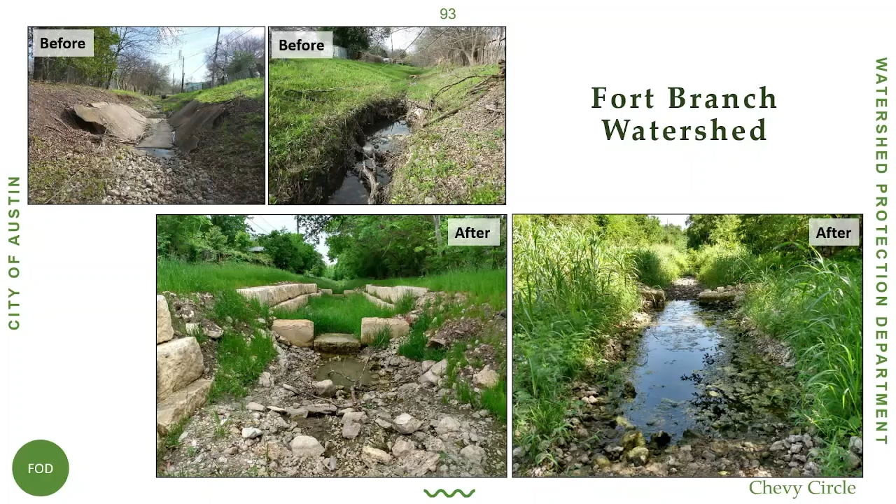Good job, Clayton. Here's an example where we're dealing with an outfall, local. I love that they didn't decide, okay, well, it's an outfall that's caused an erosion, caused a head cut, we're just going to pipe it and let it go straight, kind of like a fire hydrant back into the creek. They kept it back, added a little bit of sinuosity, slowing the flows, slowing that erosive flow, built in a little bit of infiltration. I really like that project too.

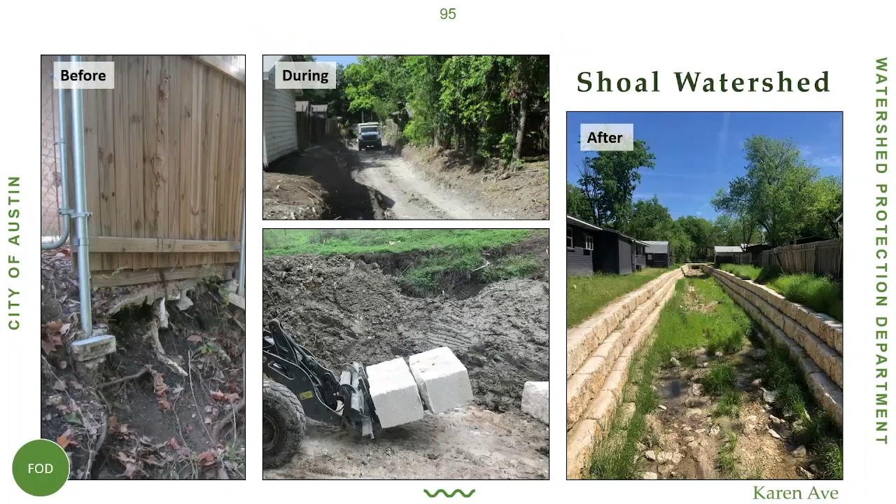Everybody needs a basic wall, right, Jana? This is right horse for the right course. Sometimes you don't have space to do really large-scale projects. So we had a really big constraint. We couldn't even put geogrid horizontally to get that extra friction, so we kept the walls low, relied on gravity, and we were able to protect these houses, and it works, and people are happy about having their houses protected. So that's our typical basic gravity wall.

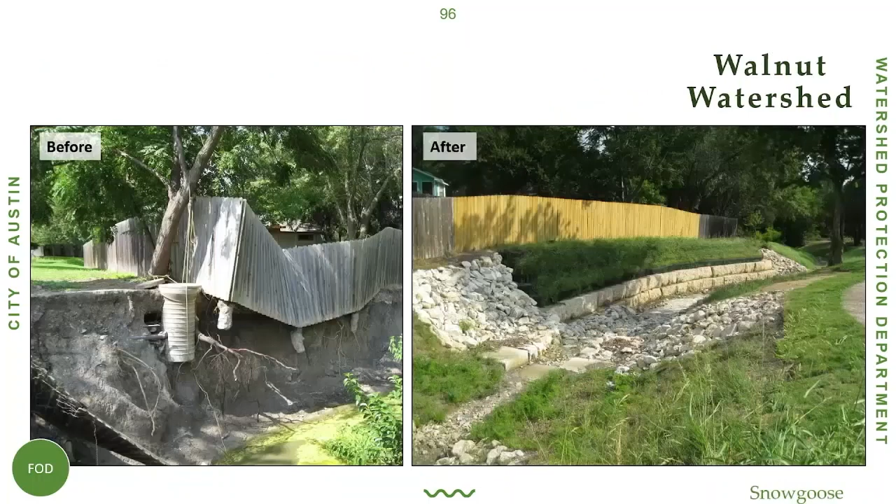Here's another shot where in one image you can really see field ops do their riprap slope, soil lifts, grade control, and boulder toe. This is another project Clayton has done, in the works or almost done.

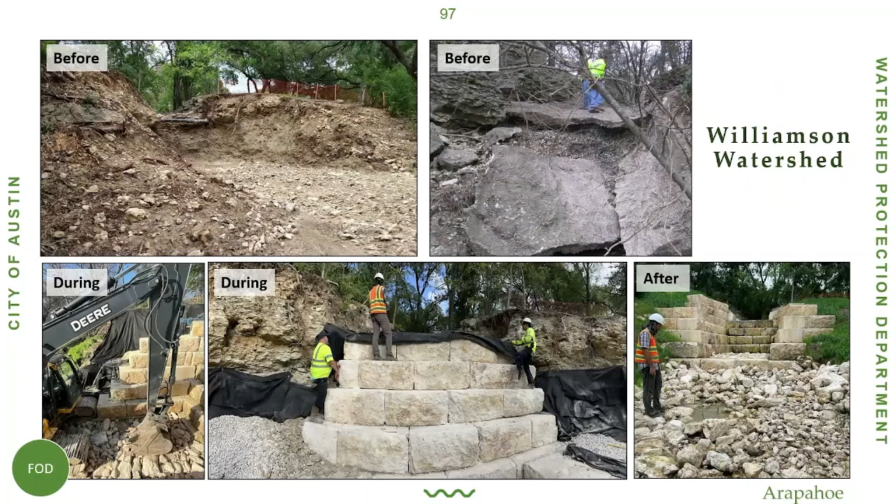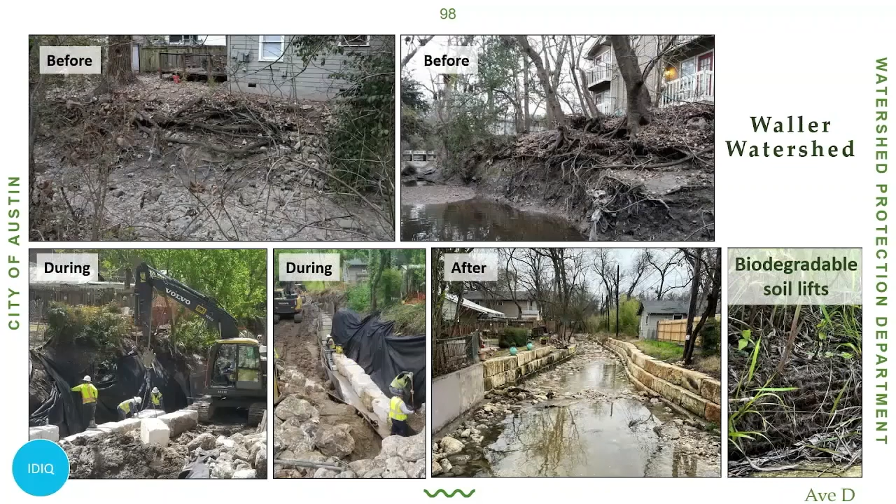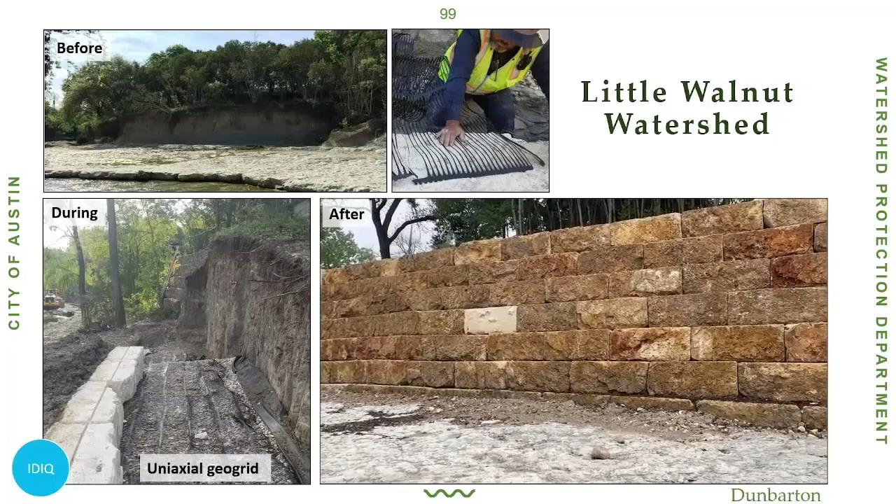Dunbarton was another project where we used really high, really big blocks. Reminds me of a moonscape. The creek cut down, hit bedrock, and kept that energy, so it started widening. We stabilized that through IDIQ.

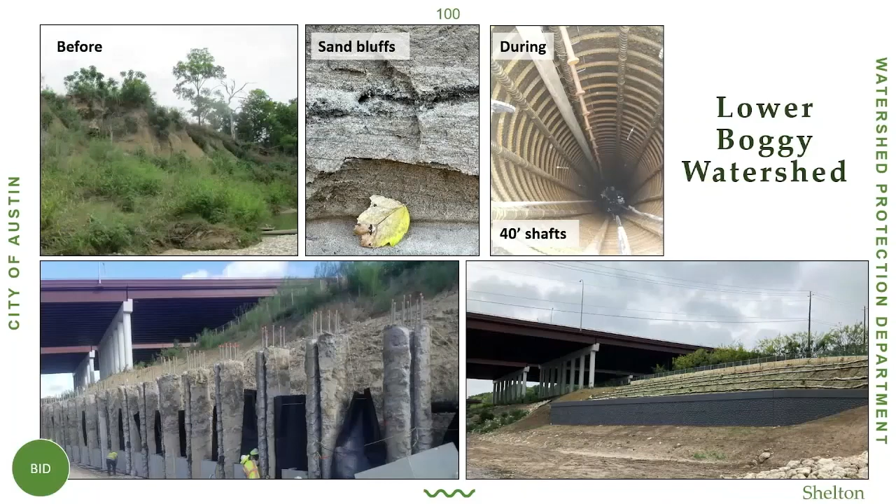We did a bid for building and installed these drilled pier walls. These are 40 feet down that we're drilling, and it really was impressive to be walking around. Now when you go across it, this is just what you see - so maybe we all should have X-ray vision for some of our projects.

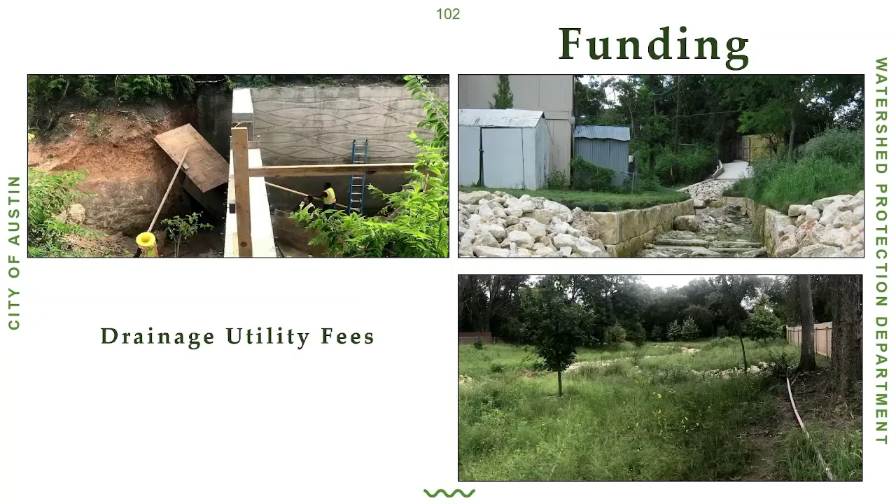Our funding is through the drainage criteria - not that one, the drainage utility fees usually. But it's also not keeping up with our expenses and what the community is expecting, so we're also pursuing more grants.

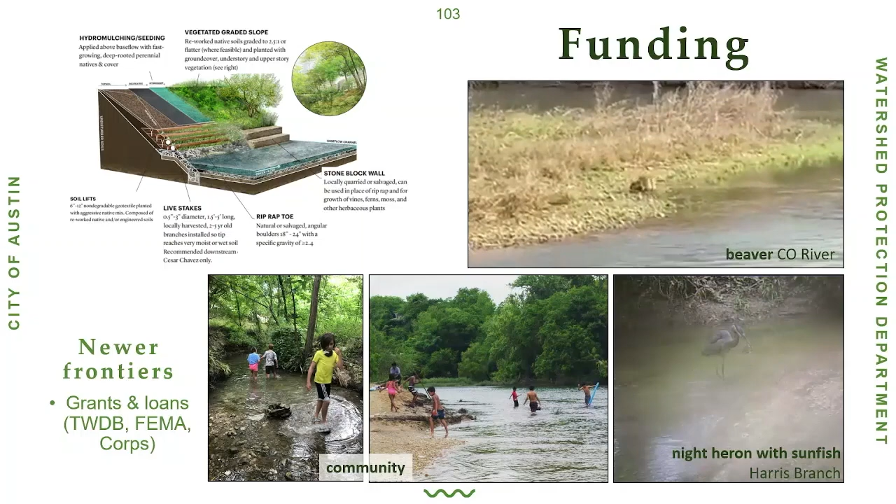I imagine that as we're pursuing more grants, we're going to have to make more of those connections to our designs, to things that the grant wants us to uplift: community, environment, what materials we're using.

We have more collaborations now. So if you're our consultant, in the past, more often running into a utility like wastewater or drinking water might be a project killer. Now, whether it's coincidence or relationships we've developed over the years, we're starting to partner on that. So instead of just removing abandoned wastewater, now if there's an upgrade that happens to be with a stream restoration, in an ideal world we're trying to get all of those wastewater lines out of the creek, because a broken wastewater line in a creek is bad for E. coli and humans.

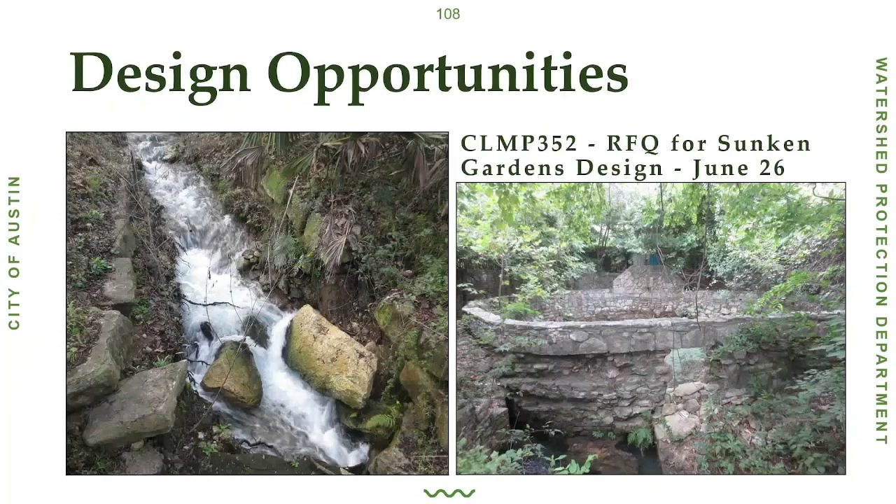Just some quick shout outs for consultants who might be interested. We have a design opportunity coming up for Sunken Gardens, and we have the rotation list, hopefully, for fall 2024. Then a couple contractor construction projects coming up.

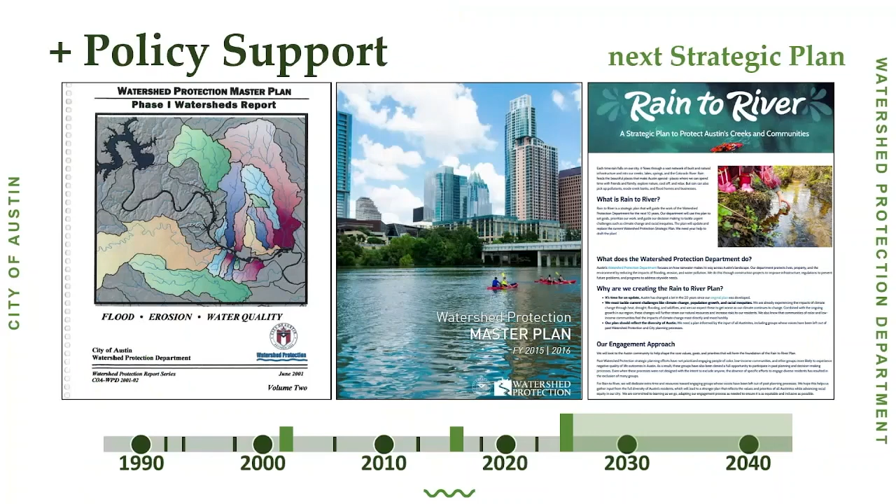The last thing I'll say is that we're going to end where we started, which is policy with a capital P. We're in this process of updating our strategic plan, and we're going to be leaning heavily on that to find out what we need to be doing in the next few years. All right, so 30 years of stream restoration - hope you guys enjoyed it.